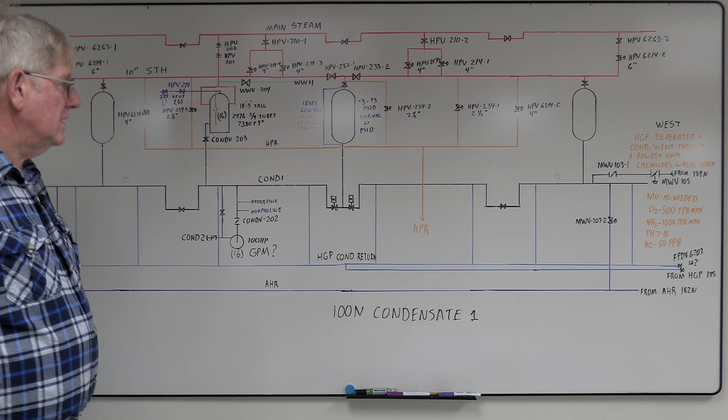Okay, this is our video on 100N Condensate 1. We did an overview the other day of how the different systems kind of tie together. The problem is these systems are very complicated and they're interconnected in a lot of different ways.

But Condensate 1, this is pretty much all the condensate coming from the dump condensers and return from Hanford Generating Project. It would come into the Condensate 1 header, broken into 4 sections, with isolation valves on each section. Part of this loop I believe is for expansion. It's a pretty long run of pipe. I don't ever know of it being isolated and still running.

But basically on Condensate 1 you had your dump condensers, there's 16 of them, dump condenser condensate pumps, there's 16 of them. And you had 3 surge tanks. I believe the standpipes were valved out at this point and they were not used.

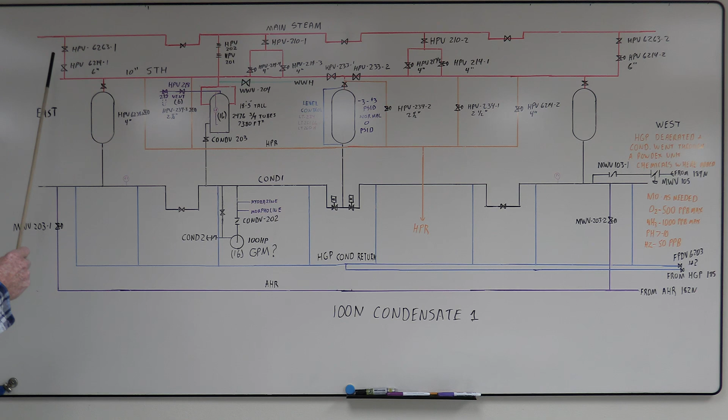What I've been told is when the Hanford Generating Project was added, they added cell 6 and a lot more valving. Usually all the valving that started out with a 6 was added at that point. I think this HPV 62, 63 would be a block for the pressure control for your 10-inch surge tank header.

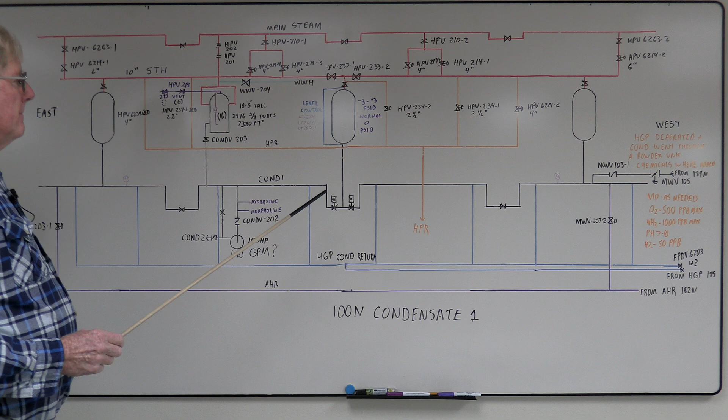The surge tank was very complicated with controls. It had to maintain 3 pounds differential pressure between your main steam header on the roof and Condensate 1, which is in the -16 basement of 109. These are also inventory control.

You had a lot of water out in this system, like all the return from Hanford Generating Project, then your drive turbine surface condensers and the turbine generator from 184 all ended up back in this system, plus the dump condensers. So maintaining level was really critical on this.

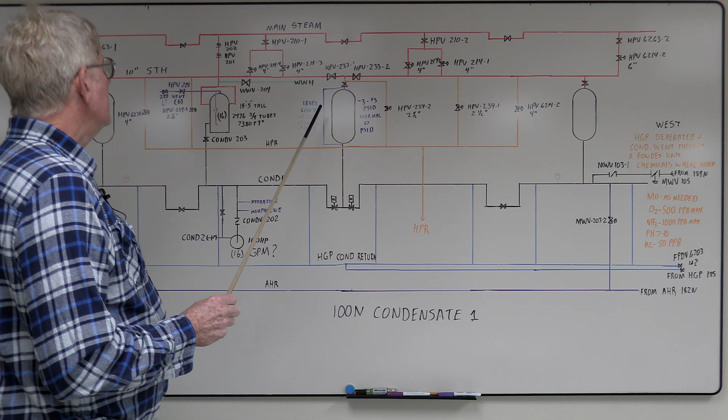From the main steam header, you had your block valves. These are on the roof. So your dump condenser valves, these are up there on the roof mezzanine. These are run with a hydro pack. These I think might have been manual blocks, I'm not sure. But all these blocks were up on the roof. It came down the mezzanine, then you had your pressure control valves.

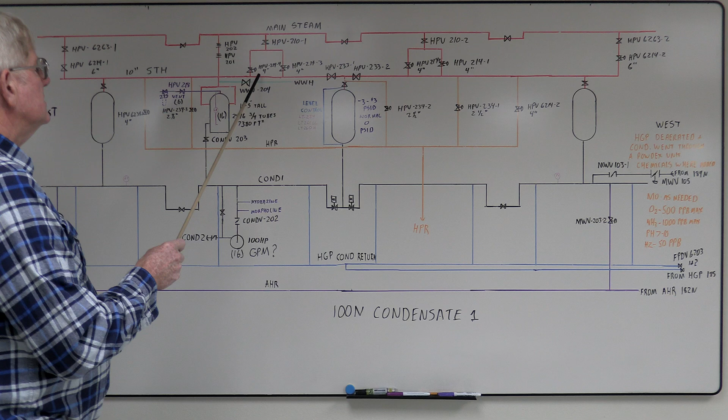Your 214s here were 4-inch valves. And like the 6214, they were 6-inch on the ends, so they had to add quite a bit more steam availability to maintain this header when they put the other surge tanks in and started running the Hanford Generating Project.

If this pressure got too high, it was dumped through the 234 valves. These were 2.5-inch. The 4 inches were on the outside. So most of these 2.5-inch valves would dump the steam down to the high pressure return header to maintain the pressure on the system. If the surge tank flooded, you could get water up here and you could lose your pressure control. If it got too low, you get steam down to your condensate pumps.

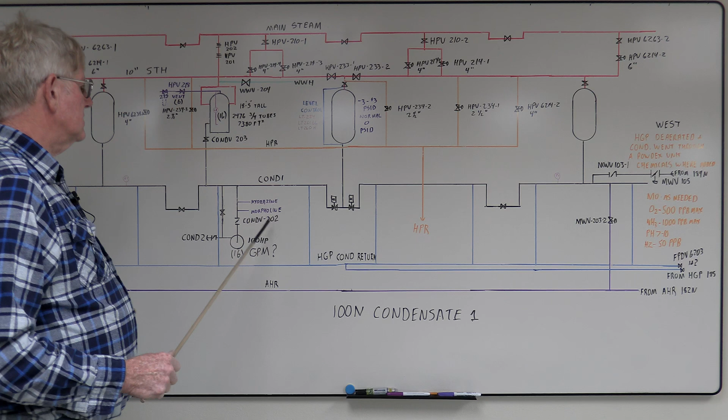On the Condensate 1 header, you had 16 condensate pumps. They were 100 horse motors. I don't know what the gallon per minute is or the discharge pressure or head. I really can't find anything on it. But you had hydrazine, morpholine could be injected down here. Most of this, I believe, was done from the Hanford Generating Project.

Our steam went over to what was called WPPSS or Hanford Generating Project. They had 2 turbines, put out about 860 megawatts electrical. The condensate was deaerated. Then it went through a Powdex unit, kind of a demin unit, and then chemicals were added, which could be hydrazine and morpholine. They used morpholine as needed to maintain pH.

O2, you went less than 50 parts per billion max. The ammonia, you went less than 1,000 parts per billion max, or basically 1 ppm. pH 7 to 10, and hydrazine less than 50 parts per billion.

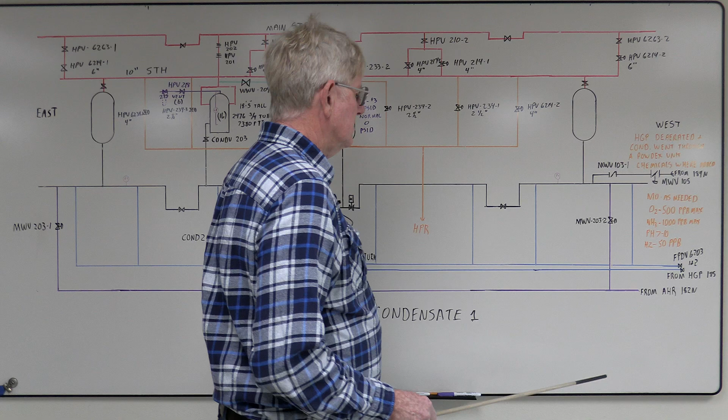Condensate coming back, you had 2 valves, FPDV 6703s. These were somewhat controlled by the surge tank. If they got in trouble losing level, or too high level, these would back off, then keep the water over there to get level under control. The condensate fed back into Condensate 1, which was then pumped back to Condensate 2 and sent to the steam generators.

In an event of high pressure, the normal steam pressure was about 135 psi. I believe this tripped at 180. If you had a trip of the generators next door, the pressure would shoot up and then it would scram the reactor. Normally they leave a couple of these running hot standby, so in case of load rejection, they pick up the load real fast.

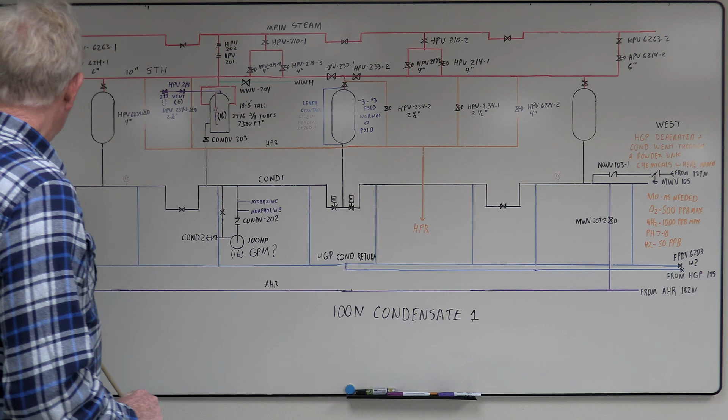Or if these levels started getting really low, these would open up and try and condense more steam and build Condensate 1 back up. If the level got too low, you had your MWV 203s, 2 of them. These would open, then your afterheat removal pumps in 182 would auto start, and you could feed water in that way. Those pumps had to be manually shut off, but they're really like 2,500 gallons a minute. It also fed the generator in 184 for emergency feed.

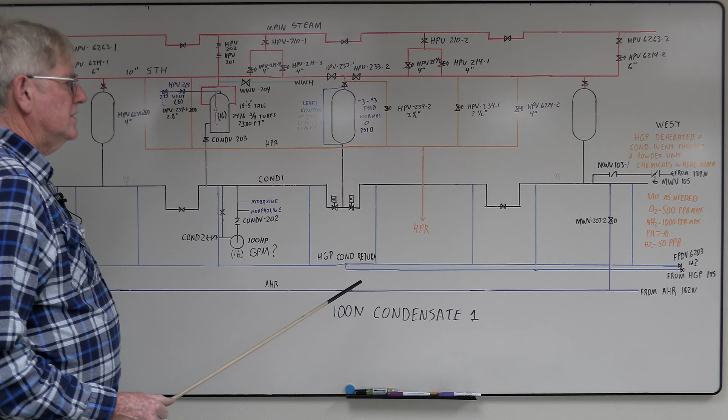On the dump condensers, you had your valves on the roof. 202 is a block valve. HPV 201 was a control valve. The steam fed in. These are 18 feet tall. Had 2,476 3/4 inch tubes.

Down here would be the water box for the tubes, or U-shaped tubes. Raw water would come in. Level transmitter was the full length of the vessel.

An interesting feature of these, you could go to water cooling, where you'd flood a steam generator. Then the water from the steam generator would come back down the water-to-water header, and then you could feed into the dump condenser, then be pumped back to the steam generator through your condensate pump. So this would cool the reactor water down to ambient temperature for basically charge, discharge, and certain maintenance activities.

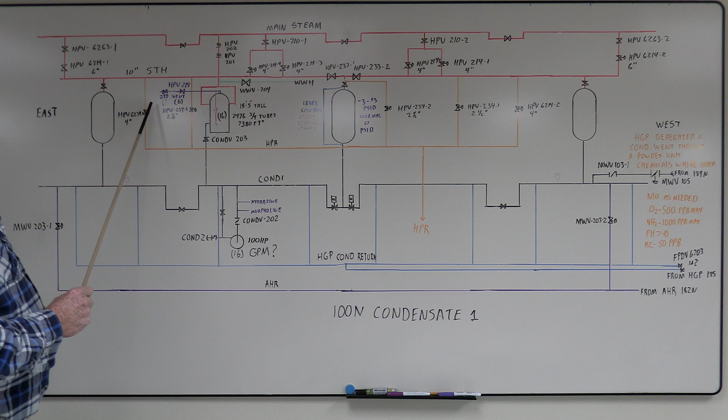Dump condensers had a vent system. There were 6 automatic vent valves. You had a 219 chain valve you'd open outside. And these HPV 218s, you could open them from the control room, vent the air off following maintenance activities.

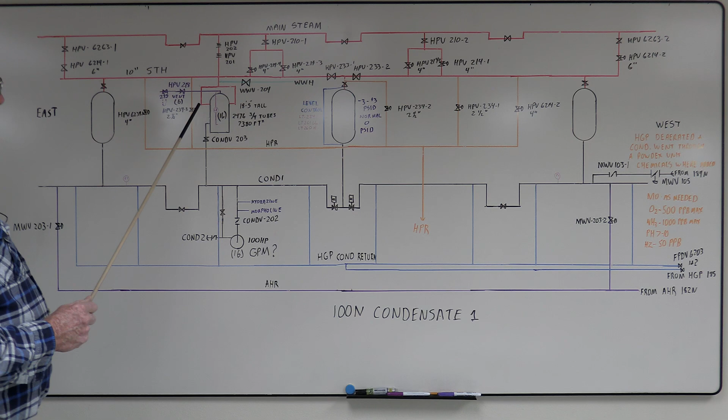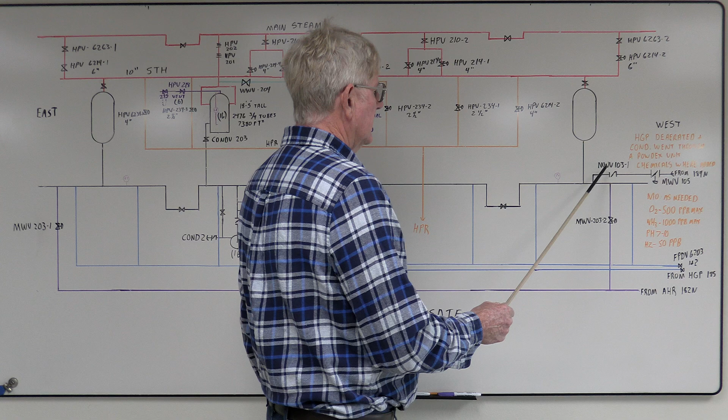There's another line that come from 184 in the powerhouse. This come off underneath the storage tank of the generator. They had MWV 105 control valve for this. Then there's a check valve. So if the pressure in this header got less than the generator storage tank, which sat up quite a ways, it could feed water in here for emergency makeup.

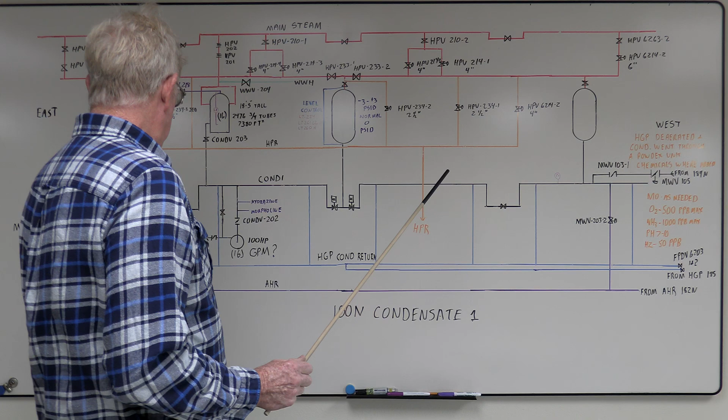Other than that, it is kind of a complicated system, the different pressure controls, and the volume of water went through this was pretty substantial. But I know we had to run 5 of the cells, or 10 steam generators on this system. And that's about it for Condensate 1.

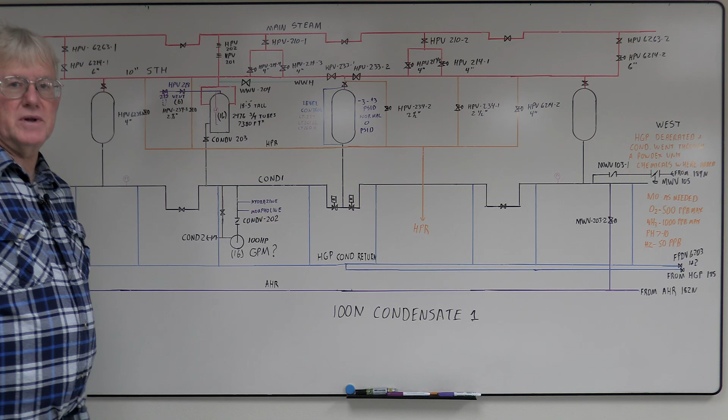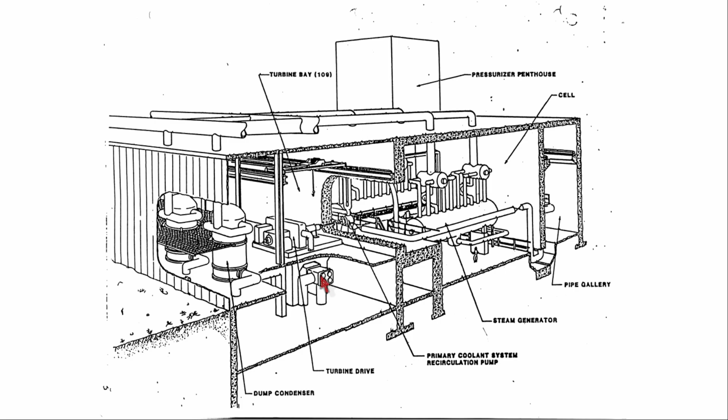This is the dump condenser. You had your 30-inch steam inlets. They went up here, hooked together, had this one line that went up to the roof. The air vents, these were used for startup to vent the air off. I believe the control room could open these pneumatic valves up. We had a chain valve we opened to vent it off.

Down here, temperature transmitters measure inlet and outlet temperatures. A level transmitter across this to see how full it was. Like I say, they had about 7,380 square feet of tube surface. I think they're Admiralty metal, which is a copper nickel alloy. Noticed quite a few tube leaks. Had to go in here and plug tubes and do various maintenance.

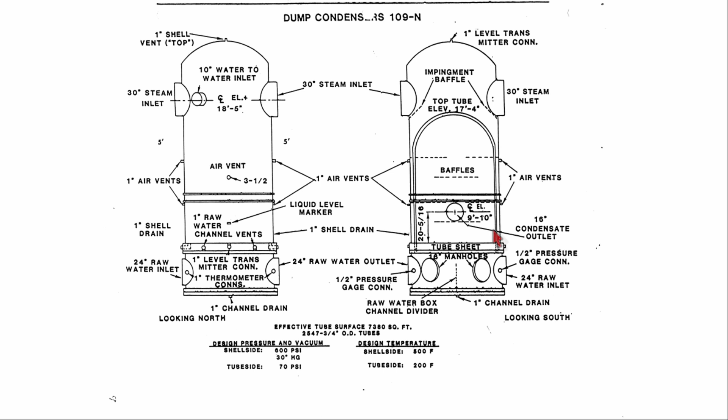If anybody has any pictures or anything, please share them. All we have is just a few drawings.